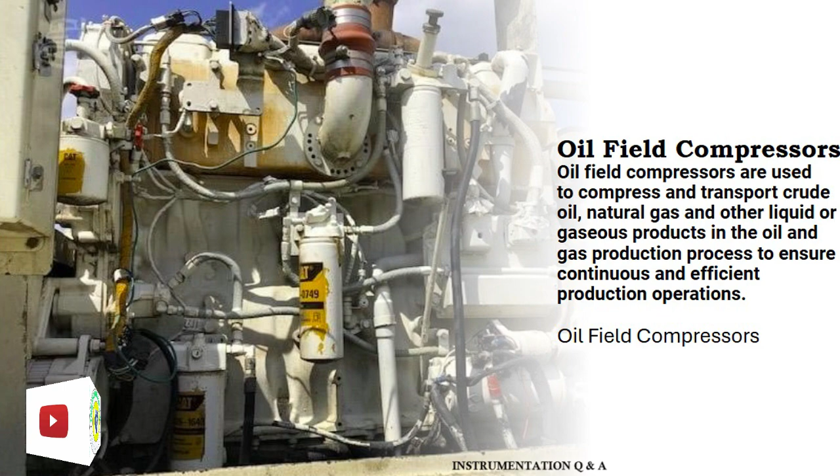Now we will discuss which types of compressors are used in the oil field and what's the difference between the pumps and the compressors. That is, what is the difference between pumps and compressors, we will learn about this now.

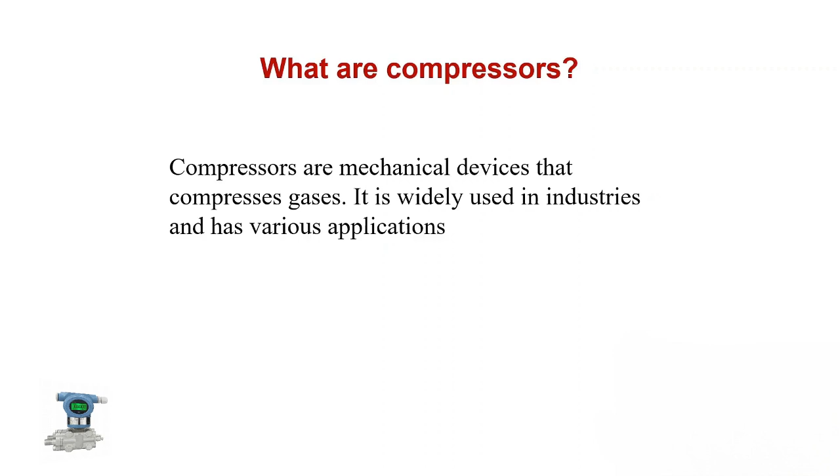There is one point you should know about the compressor. Compressors, gas used for the gas and pumps used for the liquid. Here we can see the gas suction pressure, suction temperature and suction velocity. Then the compressor will compress this gas and it will provide us discharge pressure, discharge temperature.

How are they different from pumps? The major difference is that compressors handle gases and pumps handle liquids. As gases are compressible, the compressor also reduces the volume of the gas. Liquids are relatively incompressible, while some can be compressed.

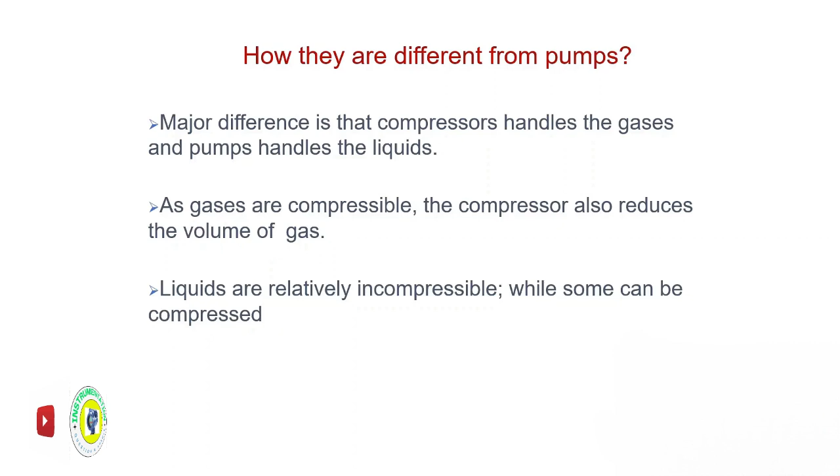Compressors are fluid machines that handle gases and vapors, which are compressible, which decrease in volume when pressure increases, which increase in temperature when pressure increases, and which are usually less dense than liquids. Compressors do not like liquid. You should know about this one.

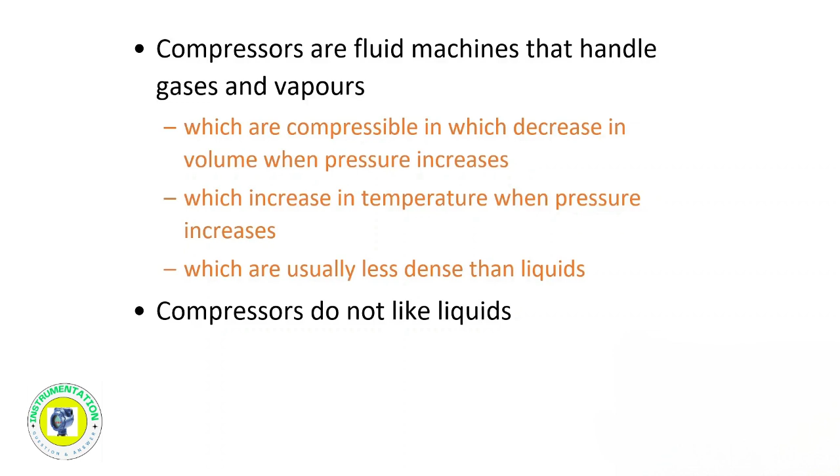What are its applications? Compressors have many everyday uses, such as in air conditioners in cars and homes, home and industrial refrigeration, gas compressions for many uses, gas injections and transportation, and air compressors for industrial manufacturing. These are the applications of the compressors. You should know about this one. What are the applications of the compressors?

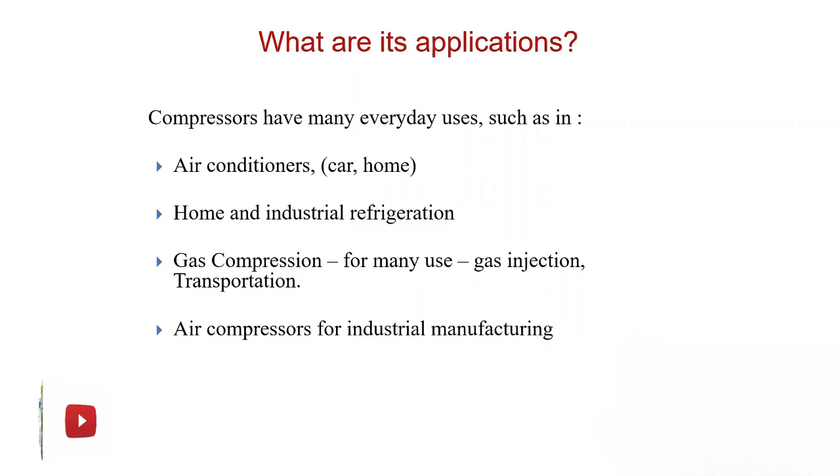You know the compressor applications. A lot of applications have the compressors, like in air conditioner systems and industrial systems.

Basic theory of the compressor we will see. Compress means to squeeze together, reduce in volume. If the three states of matter are looked at, it can be seen that only gas has the properties which allow for compression, not liquids. Solids have molecules packed tightly together in a regular structure.

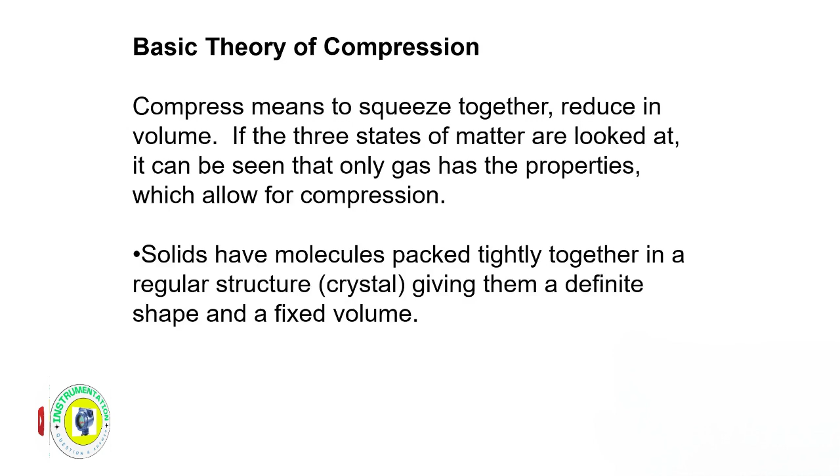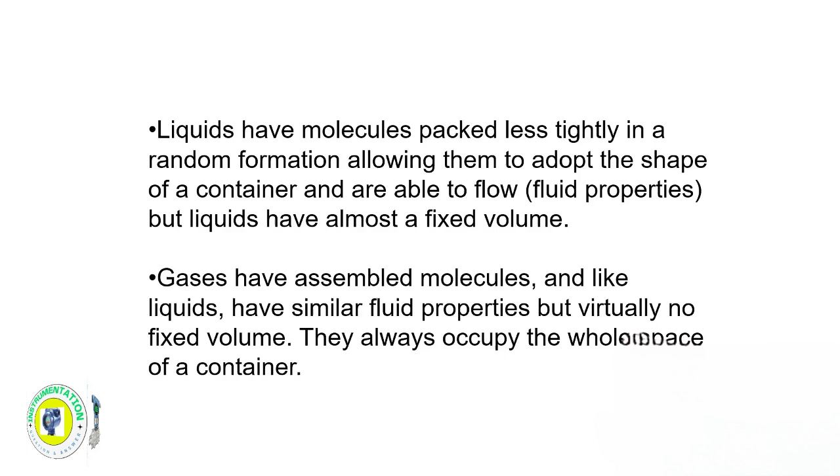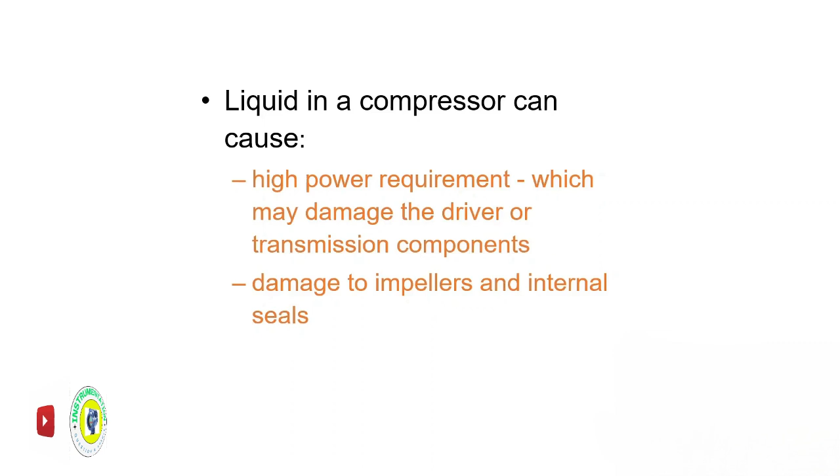We can see, by Boyle's law, the basic law which relates pressure and volume in a gas is known as Boyle's law. This law states that at a constant temperature, the volume of a given mass of gas is inversely proportional to its absolute pressure. This may be written as an equation as follows: P1 V1 equal to P2 V2.

In this equation, P1 is the initial pressure, P2 is the final pressure, V1 is the initial volume, and V2 is the final volume. This is Boyle's law.

If we see here, Boyle's law is the relationship between the pressure P and the volume V of a confined gas held at a constant temperature. Here you can see when volume increased, the pressure decreased. When pressure increased, we can see the volume decreased. Even if the temperature is constant, when pressure increased, then the volume decreased. This is Boyle's law.

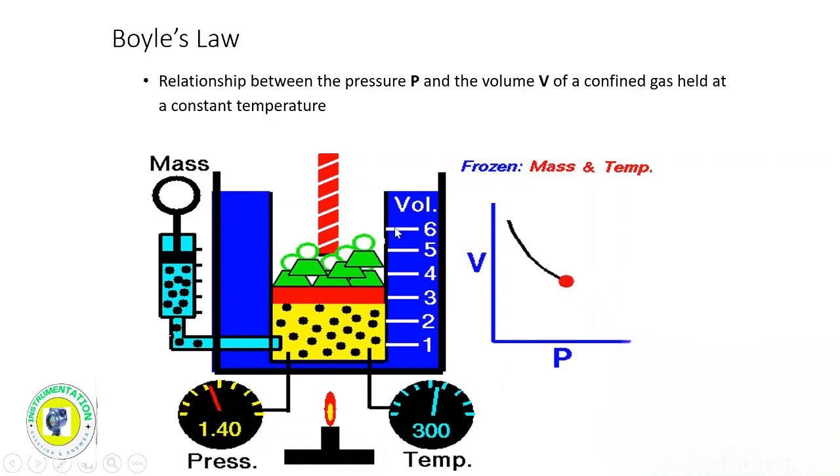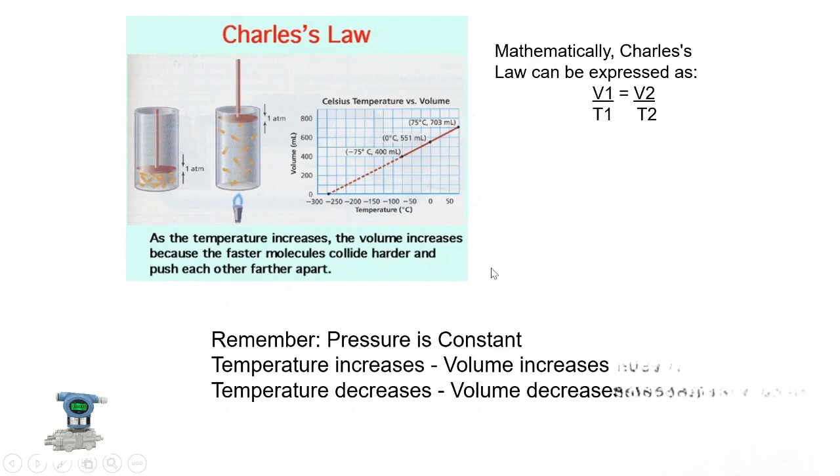Here we will see Charles' law. Mathematically, Charles' law can be expressed as V1 over T1 equal to V2 over T2. Remember, pressure is constant, temperature increases, volume increases. Temperature decreases, volume decreases. Here we can see, as per Charles' law, the relationship between temperature and volume at a constant number of moles and pressure is called

Charles and Gay-Lussac's law. Here we can see the pressure is constant. When temperature increased, the volume increased.

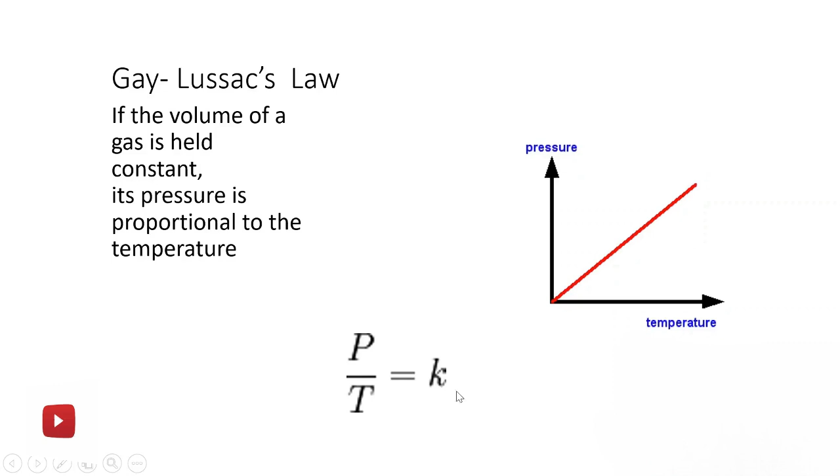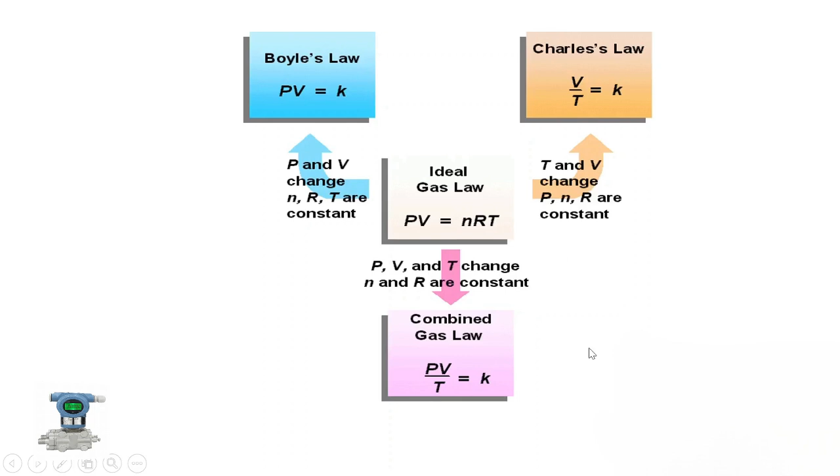So these are the laws of Boyle's, Charles, and the ideal gas law and combined gas law. You should remember about this one. You should memorize what are the laws of pressures and volumes, temperatures and volumes.